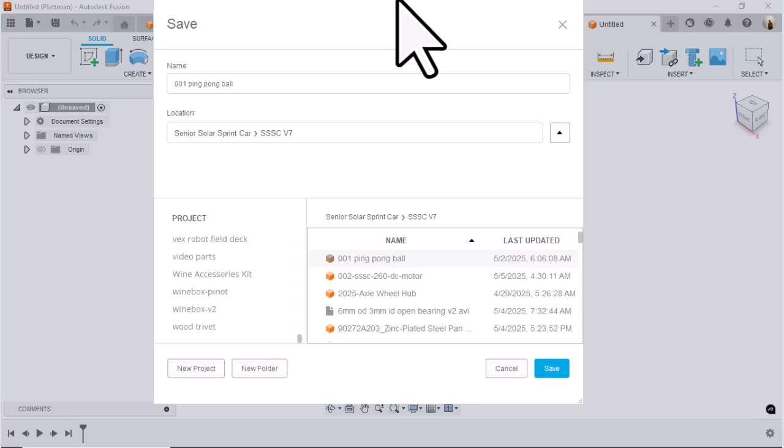Now what I'm going to do is place, open this up. We're in V7 right now. I'm going to go ahead and take this and place it out here. Once it's placed out here, I'm going to hit OK. That'll lock it into place because you see the anchor right here on the part.

We'll roll up here and see if we can find some suspension parts. I don't see them here in this folder, but we do already have them in the 8 folder. So we'll come over here to SSSC V8 and open that up, and we'll place the front one in here.

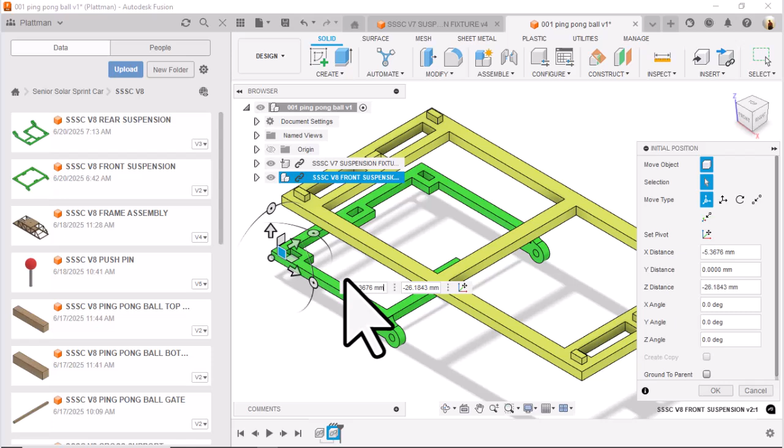Now these will come in like this. So I'm going to go ahead and pull this down like that, and slide this forward, kind of pre-position it. Let me just roll out here a little further so you can see it. I'll come up here like this, and it's pretty simple how this thing works.

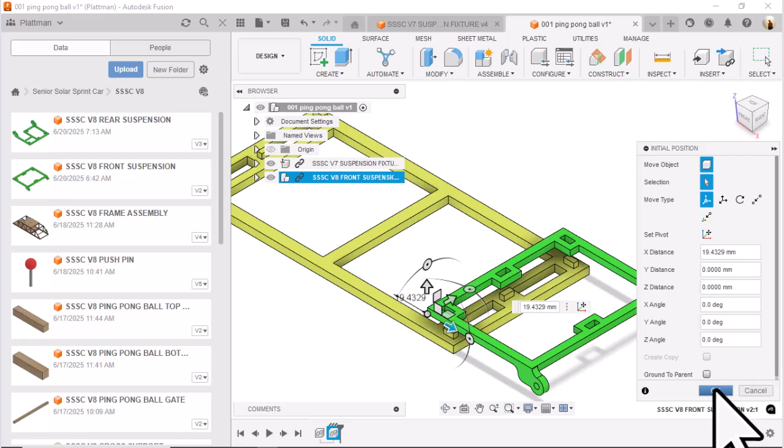You basically come in here and place it right here, and just put a place there. What I'm going to do is a joint, and I'm just going to grab this one center part right here, rotate the model up and grab that right there, and it'll line it up. Okay, so now I hit accept on that.

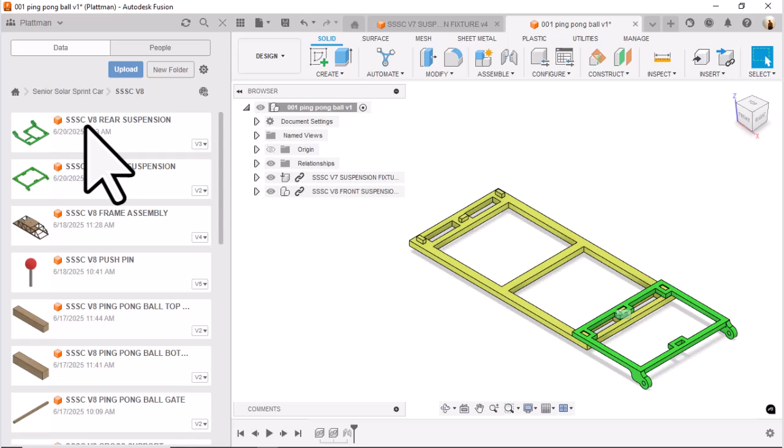We'll go to the 3D view. We'll roll out here and we can see how it's lined up. Now I'm going to go ahead and place the rear one in there as well. So I'm going to go and put him in here like so.

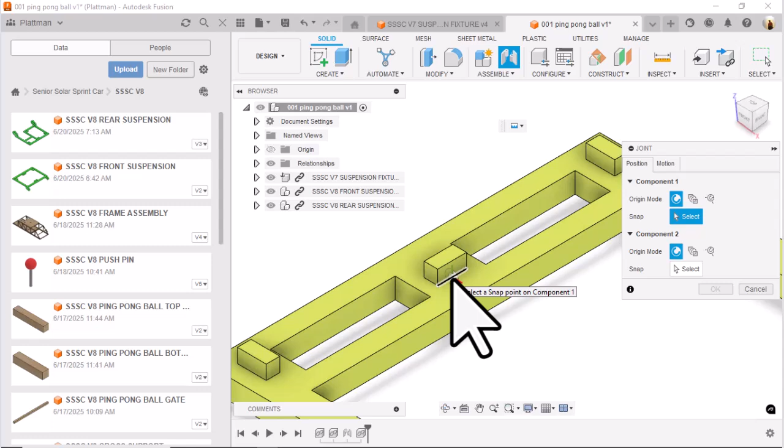Now again, this one comes in upside down, so we're going to have to fix that. So I'm going to rotate this around 180 degrees. I'm going to do the same kind of joint operation as I did before, and I'll hit the J key for that. I'll roll up here, pan over, come up here on this, and I'll put the J key, point there.

So now what we're going to do is roll this out, and we're going to take a look at it. I'm going to hit OK, and you'll see both parts joined together.

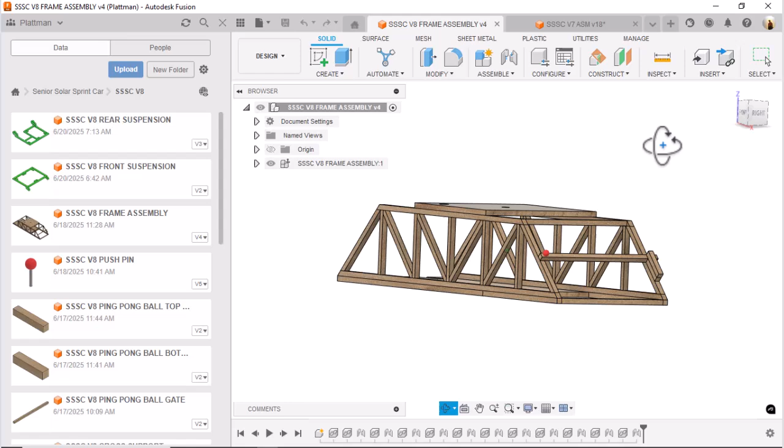Now what this does is allow you to take these 3 components and put glue on the top edge of here, and glue on the top edge of here, and flip it upside down and attach it to the actual frame itself, this guy right here. You'll come in here and put it in upside down underneath this, so that the front and rear wheels will be perfectly aligned and the car will track truer down the track as it's racing.

Now going back to this assembly, this test assembly that we're talking about, let me see if I can find that. Okay, that's the assembly there. I'm going to keep that up, and let's go find that assembly real quick.

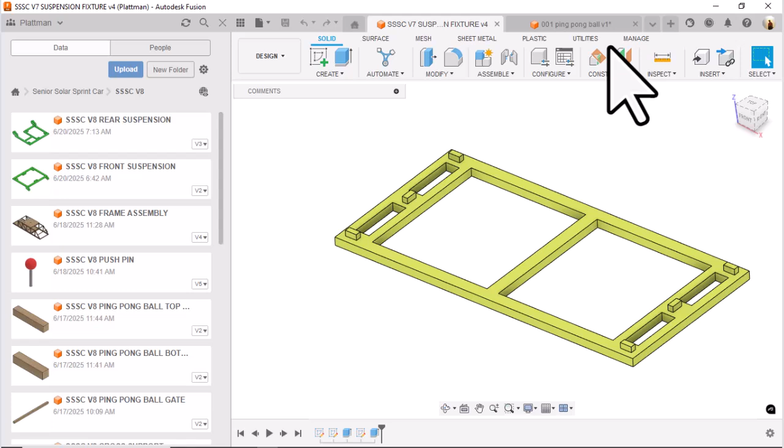This guy right here. Okay, so we're going to take this guy and put glue on the bottom of the frame, and then we take this guy, turn it upside down, place it, and then this alignment tool makes sure that the front and the rear are perfectly aligned.

So then we remove it. We don't glue this onto the car. We just remove this and get it out of the way because we're not going to need it after that.

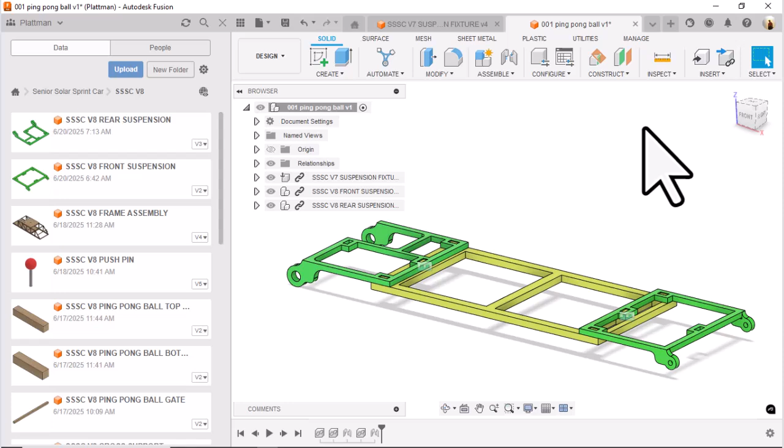And you can see that actually in the original assembly, if I can find that guy real quick. Let me see if I can find it here. Let's do this.

We'll open all these up. Okay.

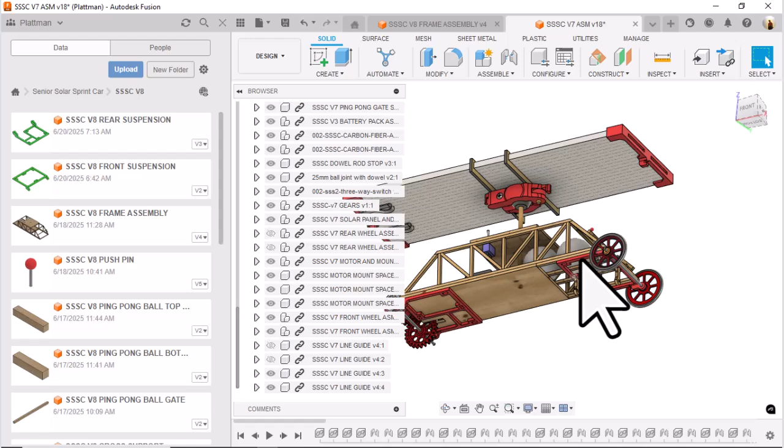Let's see here. Yeah, the V7 assembly. So when you take this and go to a 3D view, what happens is that alignment tool aligns these parts up perfectly, so that way you can remove it after these pieces - the front and rear suspensions - are glued onto the car. So that gives you a pretty good understanding. Kind of long-winded, but...

We need to do that so you guys can understand it. So I'm going to come over here and start looking at some parts. Keep that one up. I'm going to go ahead and end that because I don't need to save it - it's just something you can see.

Now I'm going to go ahead and create a new file, and in that new file I'm going to do a save here, and we'll say SSSC V8, and we'll say suspension alignment tool.

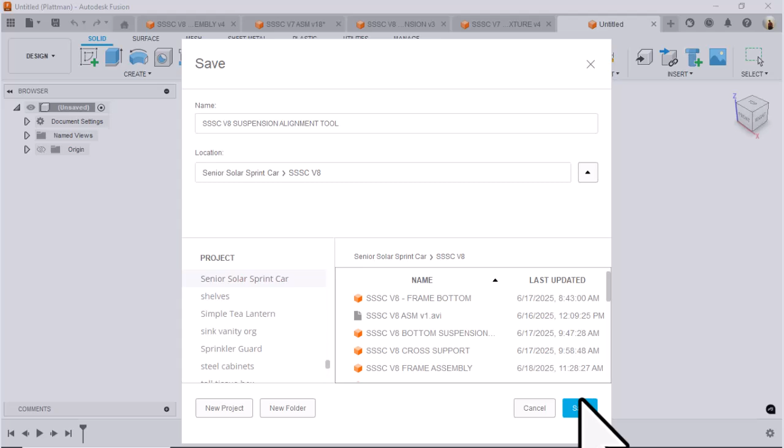Highlight all that, copy this. Now we need to make sure we put it in the correct directory. So I'm going to go back to this and find my V8 directory and make sure that file is saved into that directory. Okay, so now once that's done, we'll go ahead and right mouse click, create a new component, highlight this, Control V, and put that in there.

Okay, so we're almost ready to get started. I'm going to go back to that fixture and take a look at it, and let's get our pencil out and let's get our post-it note out so we can write some notes here. So the first thing I want to do is find my post-it note.

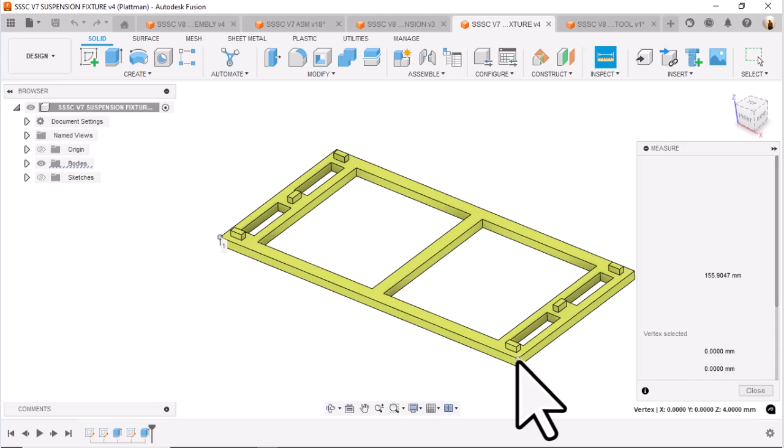Here we go, and I'm going to write down some measurements. We'll go ahead and hit the I key for inspect. We're going to take a measurement from here to there, and that's 155.9047.

And I think this other one should be about 78 millimeters, but we'll double check that. So we'll go from here to there, and yes, it is 78 millimeters. I'm just going to go ahead and copy that. Actually, I'm not going to do that.

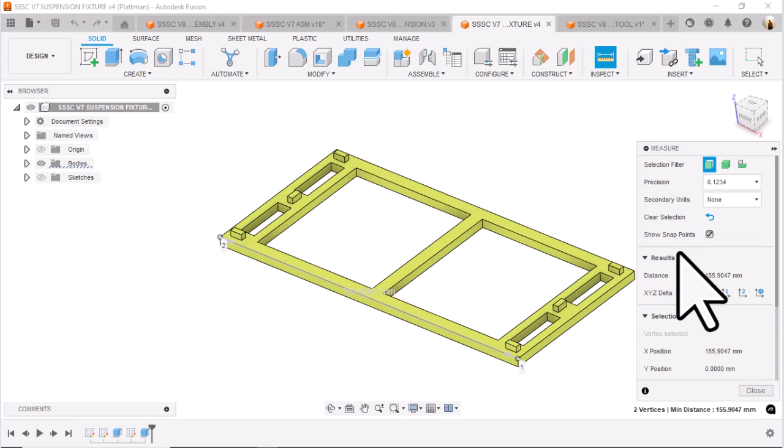I'm going to come over and get that measurement again here, and I'm going to copy that one because that's a longer number. So we'll come over here and go to the top view, as you can see, and we'll draw us a rectangle. Okay, we'll say 78 millimeters, tab, Control V.

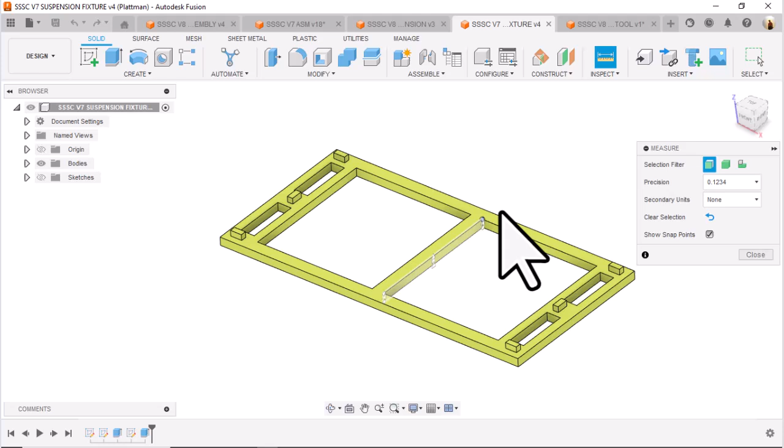Okay, there we go. Now let's go back to that fixture and catch a quick little measurement here. It looks like 4 millimeters from this point to that point. We'll make sure we look at that. Actually, let's see, right here - let me take a closer look at that. It is 6 millimeters. Okay, that's good.

All right, so we'll come back over here to this, and we'll do an offset to the inside. Flip that, and we'll say 6 millimeters. Whoops, wrong direction - we don't want to go two-sided, we want to go one-sided, and we want to flip that. So that's better. Okay, got that.

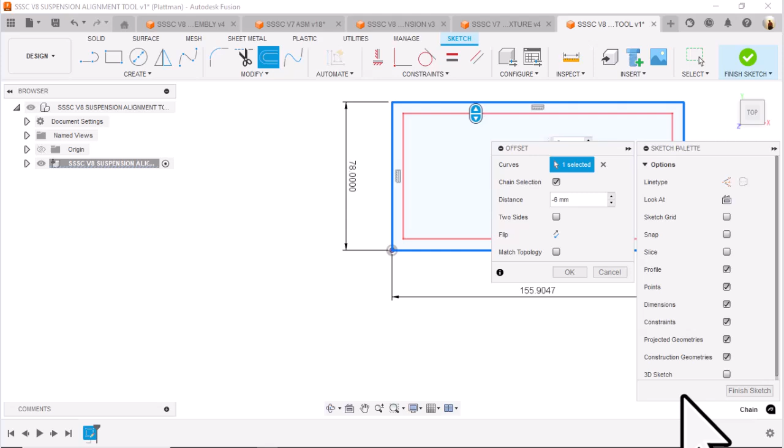All right, now I'm going to go ahead and place a center line because I know I'm going to use it. I'm going to come up here and snap - make sure you get center line. I'm up here, find the midpoint, come up here to that. I'm going to turn these constraints off so I can see it, and hit my line command again, and make sure I'm set to center line. Come across here and come across there.

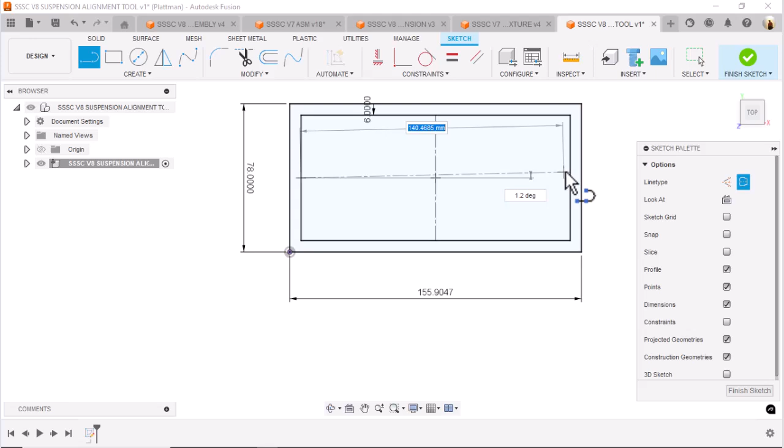Okay, it's a good place to take a quick little break. Come back to this in a moment.

Okay, now that we've got that drawn in, let's go ahead and look back at that fixture again. Looks like we got a middle beam coming off there. Okay, that's fine. So we'll come back over here and, whoops, go back and check that one more time. Hit the inspect command - I want to get a measurement on this. Okay, that's 6 millimeters. Sounds good.

Okay, just highlight that. We'll come back to here, and what we're going to do is an offset. Hit this guy here, and I can come off Control V divided by 2.

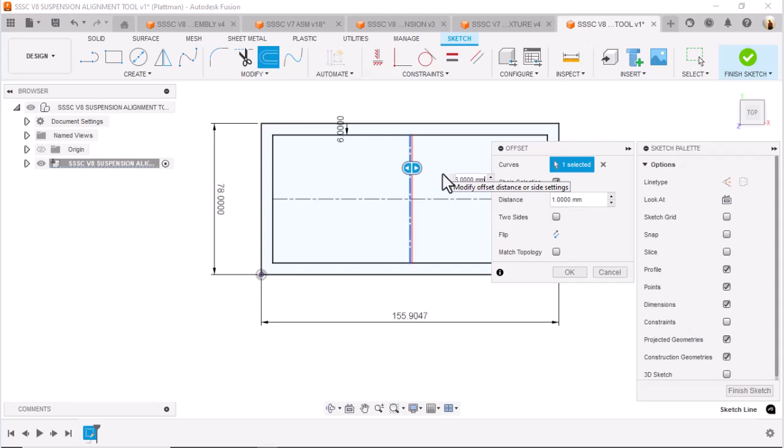Okay, so that gives me 3 millimeters. I know that's a little bit of a roundabout way to do it, but it does show you how you can use equations inside of Fusion.

So now I'm going to come up here and do a trim, get that out, move up here, get that one going, get that one going. Okay, it looks pretty good.

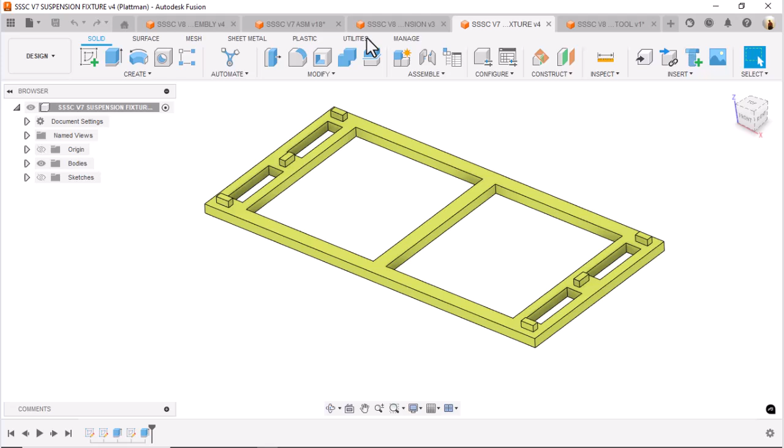Now let's go back to this fixture, and let's get a quick measurement from here to here. Make sure that it says it's 15 millimeters. Okay, all right, we can do that.

So we'll go back to this, and we'll come in here, and we will draw us a line somewhere here. Doesn't have to be perfect. Now that's still set to a center line, so I'm going to go ahead and select that line, make it a solid, and I'm going to do a dimension from here to there, and I'm going to say 15 millimeters.

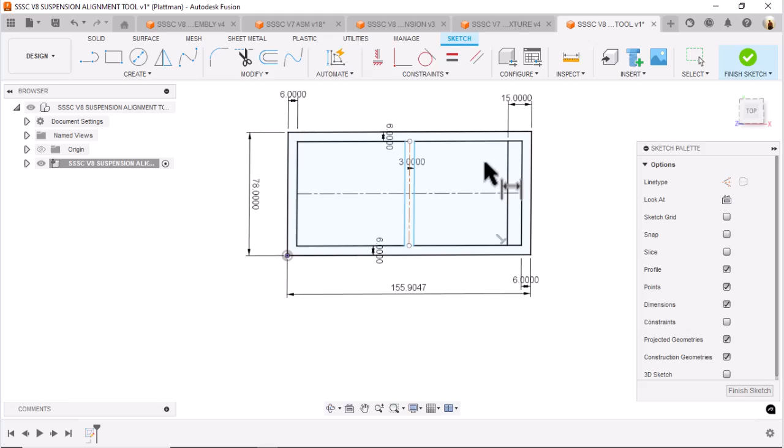Okay, looks pretty good. I'm going to double check this one more time. Hit the inspect from here to there. Yes, it's 15 millimeters. Okay, let's go ahead and reset that.

Let's get a quick measurement of this guy right here. So we'll go from here to here. That's 4 millimeters. Okay, we can make that happen.

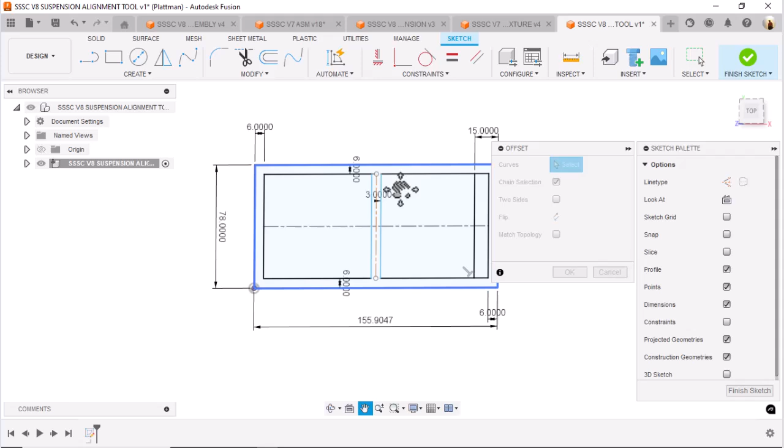So we'll come up here, do an offset on this guy right here, and we'll flip the direction, and we'll say -4. Okay, so that's in. Now it's looking pretty good. What I'm going to do is try to construct all this geometry, then I'll mirror it to the other side.

Okay, now what I want to do is I want to go to a top view, because this does look different. So I'm going to come up here and I'm going to catch a measurement of this to there. Okay, and that says 8.85.

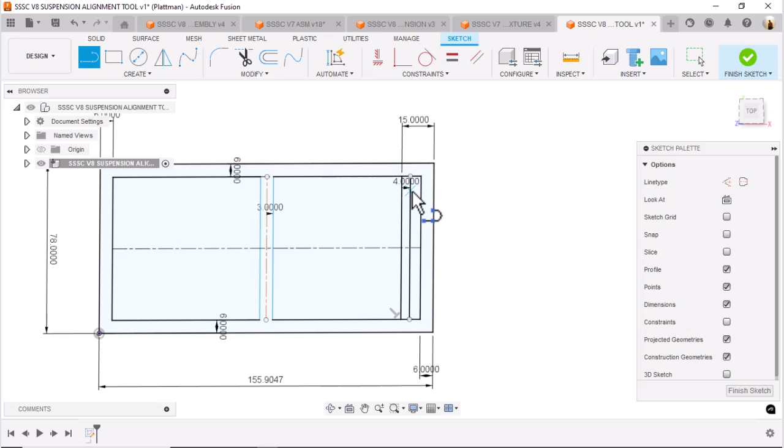Sounds good. We'll come over here and draw us a line somewhere in here. I'll just put it over here, and I'll come into a dimension from there to there, Control V, 8.85.

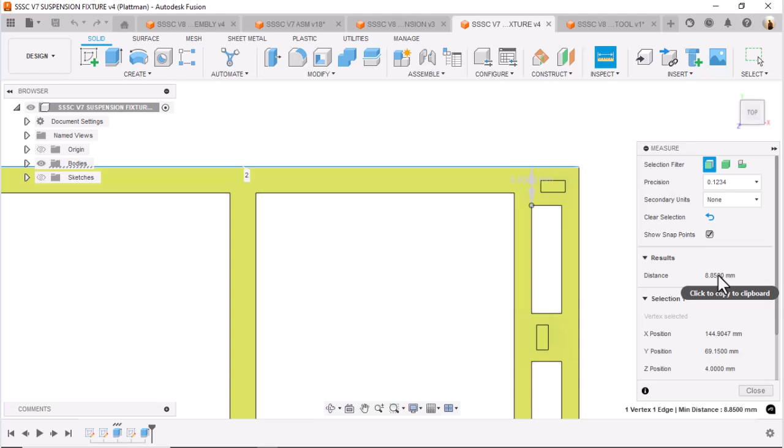Let's check that again. We'll do that again, measure. Distance of 8.85. Okay, let's go back over there. That should have not gone. Okay, for some reason.

Oh, put a center line in there. Okay, we're going to do a Control Z on this. Okay, there it is. So we'll take that, because it was a center line. Take that out, and we'll go ahead and dimension this again.

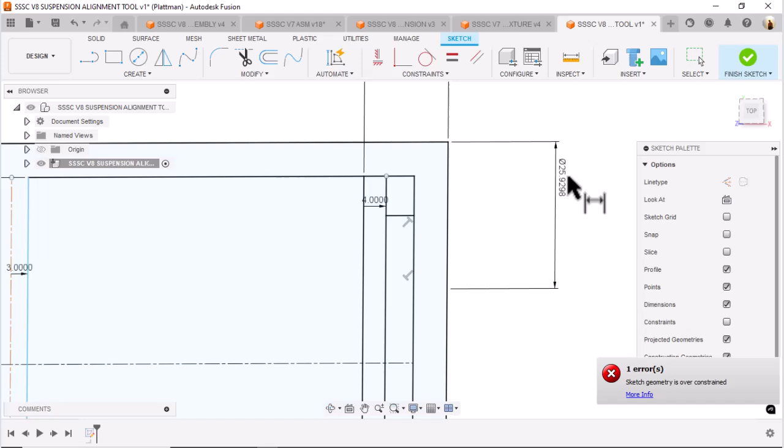Okay, I'm going to take that out. There we go. Dimension this again. And we'll say Control V. Better. All right, I like that better.

Okay, so now I'm going to hit the T key to trim. I'm just going to trim this out.

Good. We'll come down here and do a mirror operation of this. Use our mirror line here. Put that right there. Good. Got that up here. Hit the trim command.

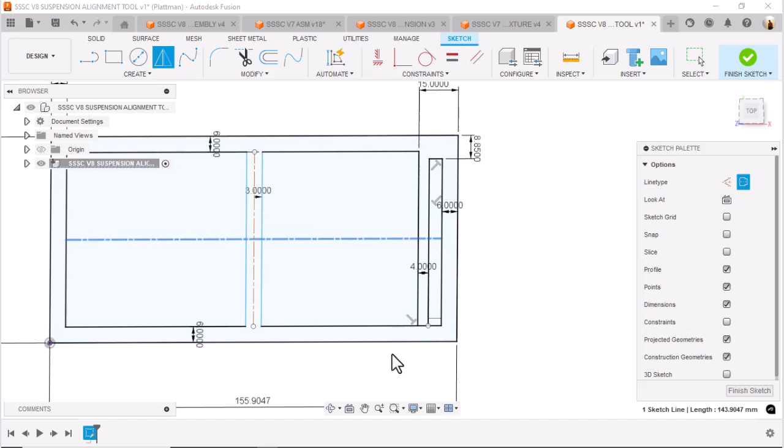Okay, it's looking good. Got to put that centerpiece in here. So let's go back and look at that. All right, so the distance from here to there is 24.6693.

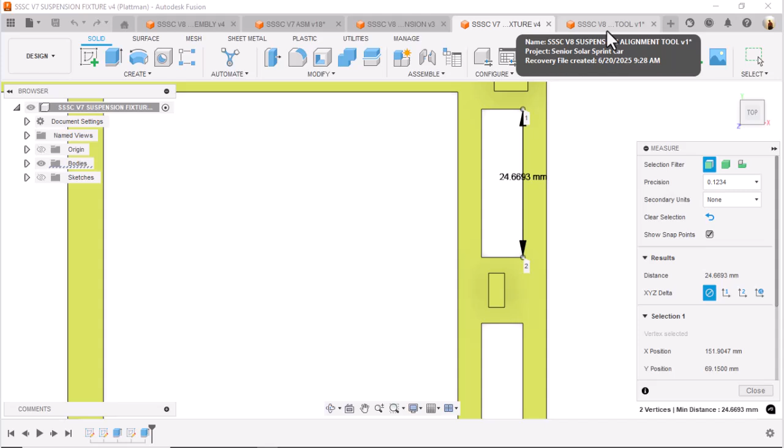We're going to copy that to the clipboard. Go back over here to this guy. We'll just put a line in here somewhere. I don't know where, but right there. And we'll put a dimension in from this here to there. And we're going to say that's Control V.

I don't know if that's correct. We're going to try that. No, it's not correct. Okay, so what we'll do is Control Z, and that distance from, let's go ahead and take this out. I'm going to say from this line here to there.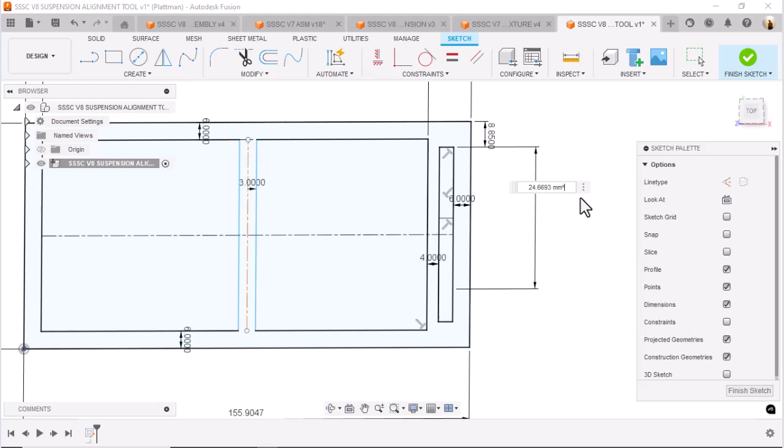Okay, so I think I know what to do. Control V, I'm going to put times 2. Okay, that got it. All right, a little bit complicated, but you get the idea.

So we'll mirror this here, select our center line there. Okay, hit OK. Now let's go do the trim. Trim this out, trim this out, trim this out. So now we've got geometry that we can copy over here to the other side.

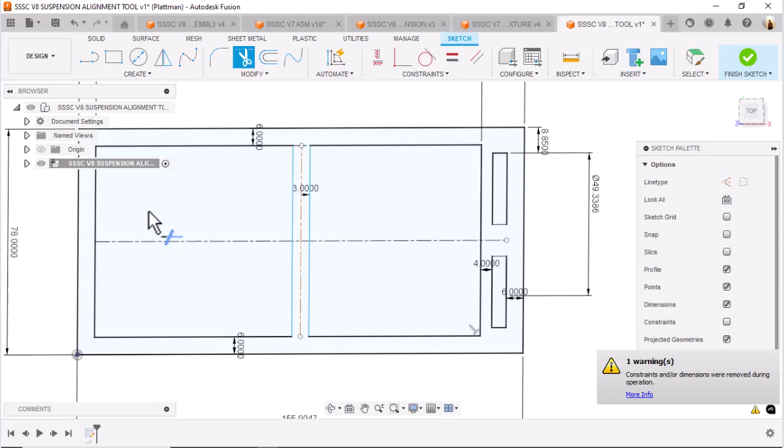Let's go ahead and do that now with the mirror operation. Roll out here, make sure we get everything we need from there. Looks good. I don't need that point, so get rid of that.

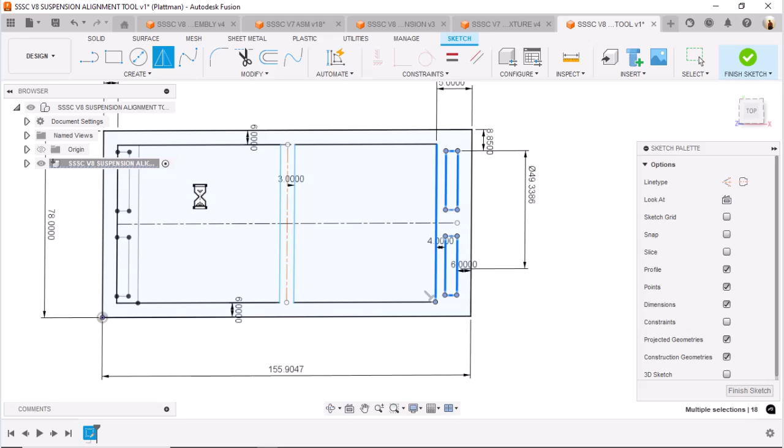Select my mirror line. There it is. And I'm missing, go back up here, I need to get that too. Hit OK. Good. Got it in. Yeah, let's trim this up. It's T command, trim.

Looks good, trim this out. Trim that out. I think I can trim this and trim that out as well. That's looking really good. Okay, I think we got what we need for the basis of that.

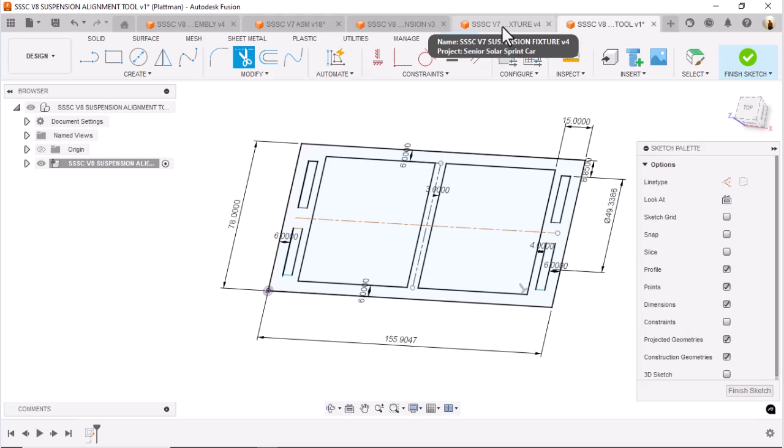Let's go check the extrusion length. I think it's 3.175. Let's measure that again. Yeah, oh, it's 4 millimeters.

Okay, we'll take that. We'll come back over here, hit the E key to extrude, and I'm going to grab this shape, and I'm going to hit distance, Control V of 4, and there it is. Okay, so we got that done.

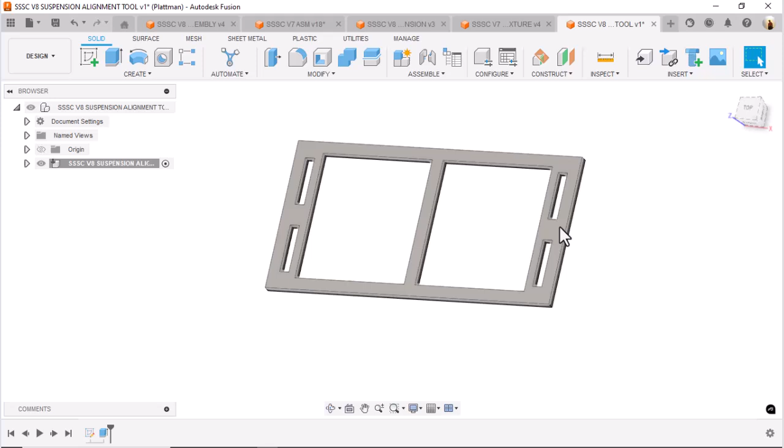Now let's stop here for a minute and come back. All right, second time's a charm. I didn't have my microphone turned on, so we'll do this again.

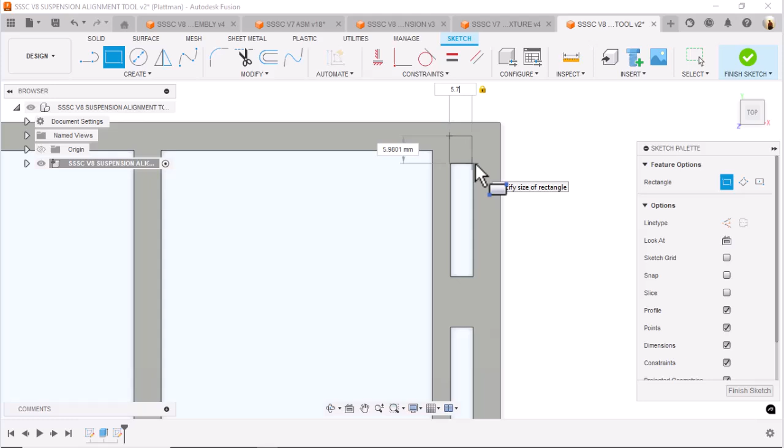So we'll go ahead and design on this plane here, put our tabs in, and I'm going to go ahead and design these tabs. I kind of already know the dimensions because I checked them. They're basically 5.7 on that, and then I'm hitting my tab key, and that's 2.7. And that basically gives us room to put the tab into the actual suspension parts with a little clearance, because printers overprint, so we make these a little smaller.

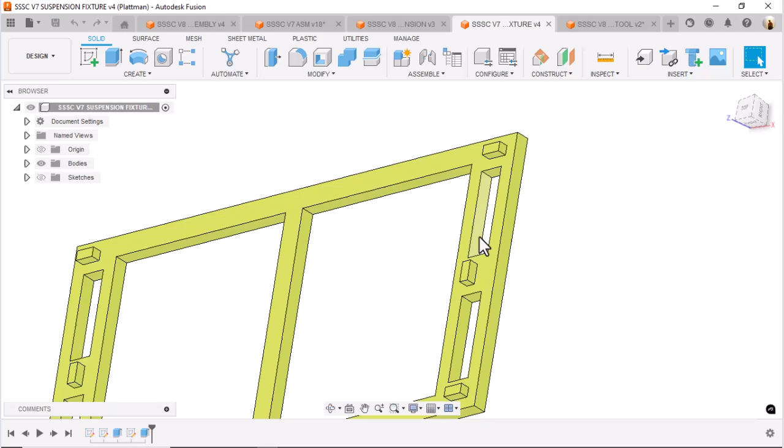Okay, now let's go back to the fixture here and let's double check some measurements. I'm going to roll out here. I'm going to hit the I key to inspect, go from there to there, which gives me a measurement of 3.15. I'll copy that to the clipboard, and I'll put a dimension in from here to here, and we'll say paste that in, move that over. That looks good.

Go back to the fixture here, hit another inspect from there to there. And again, that's 3.15. We'll take and copy that to the clipboard, hit our dimension command here, and put that in.

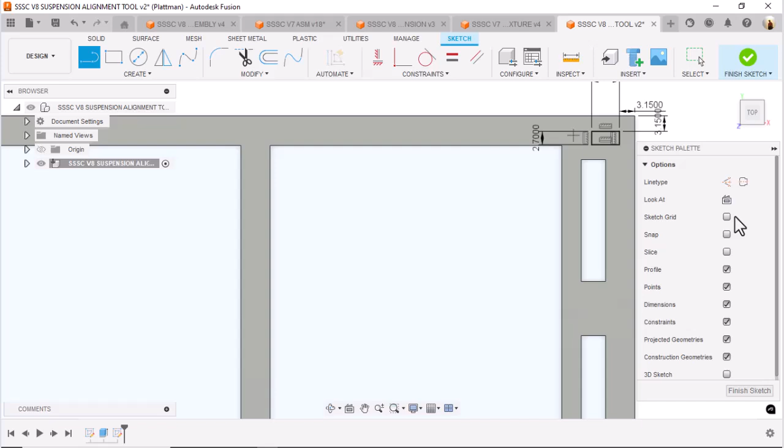Now, one of the things that I should have done before I started this is I should have put a center line in. So we'll go ahead and hit the L key for line, and we hit center line up here. We'll grab the midpoint of that outside projected surface, grab that. We've got a center line in there now.

And now I'm going to come over here and do another one, except, whoops, let's do that again. We'll put another center line in, make sure it's that center line. Find the midpoint, there it is. Take it all the way to that edge. We'll come back to that as to why later.

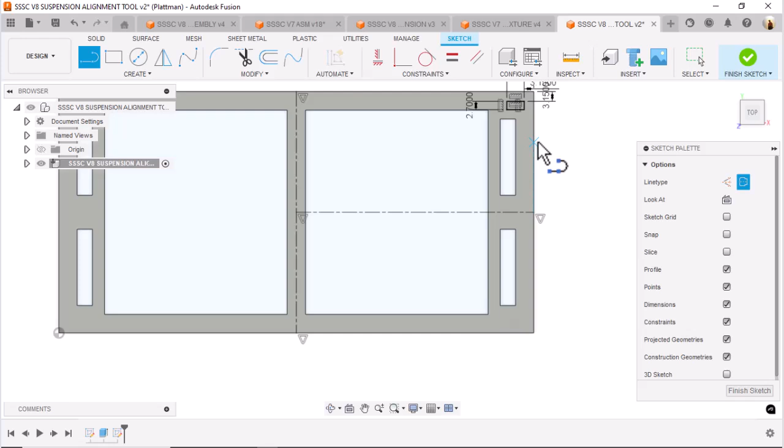So now let's go ahead and mirror operation this guy right there. Let's find our center line, which is this guy here, and there it is.

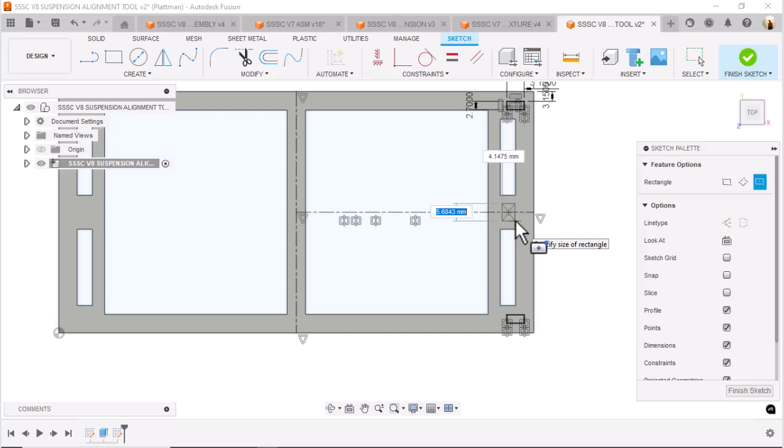Very good. Okay, so next we'll go and place a rectangle by center. I'm just going to put it somewhere right in here. And again, our sizes are the same. They're 5.7. Whoops, not 5.0. Let's double click on that again. Double click on that. 5.7. Okay, put that in there. And that should be a dimension of 2.7. Okay, all right, that's in there.

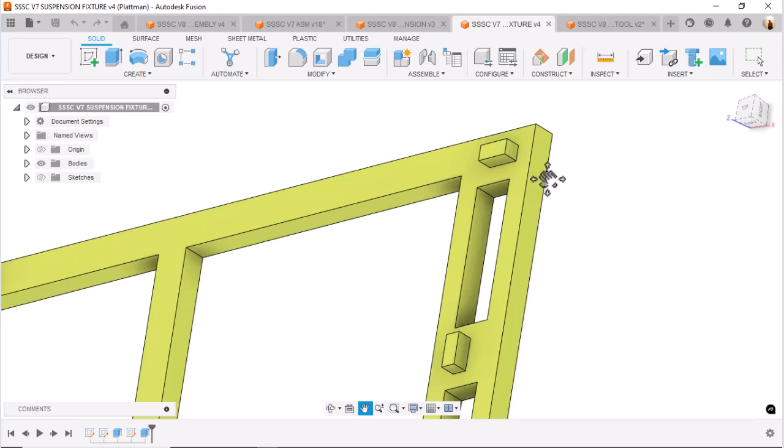So let's go back to this and let's catch a measurement using our I key for inspect. We'll measure from here to there. And that says 7.1023. We'll copy that to the clipboard.

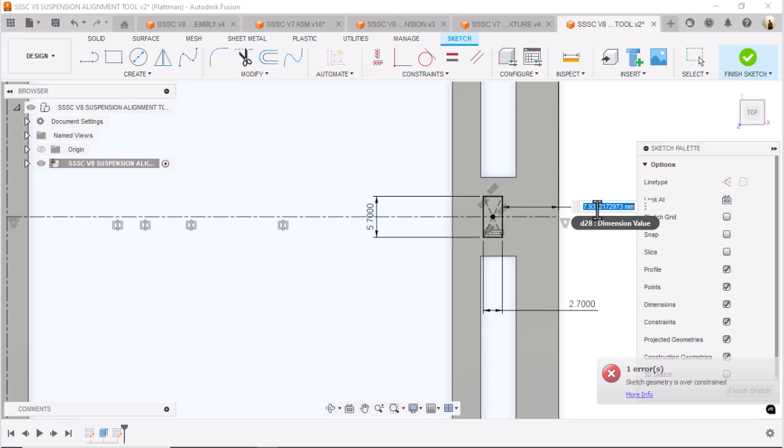We'll come back over here to this, hit dimension. We'll come in here to there. Whoops, we don't need an angle. Dimension again, here to there, and we'll just paste that number in from before. All right, that looks good.

Now we'll roll out here a little bit, and we're going to use a mirror operation. We're going to move this out of the way because we're going to use our shift key. I'm going to hold my shift key down. Got that. Keeping with my shift key down, I'm going to get this. I'm going to come over here with my shift key down. I'm going to get that. I don't know why it highlighted that point, but we're going to get rid of that and that. Whoop, I'll get rid of these two.

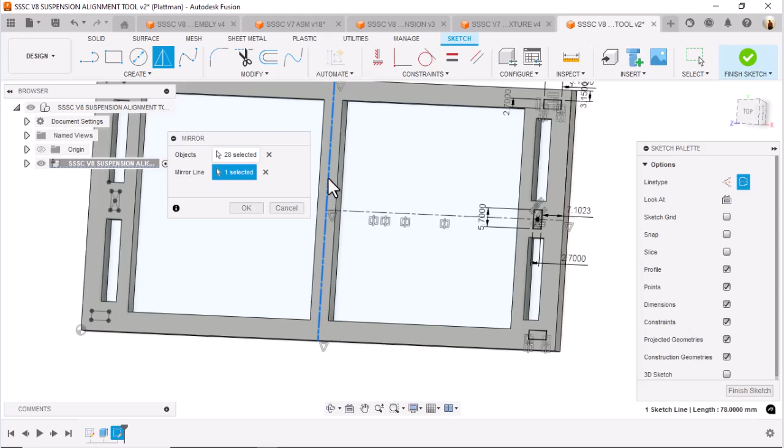Okay, now we'll go and find our middle center line and put that in there. That looks good. All right, hit OK. And now we'll hit our E key, but let's double check that measurement because I can't remember everything. We'll do an inspect again.

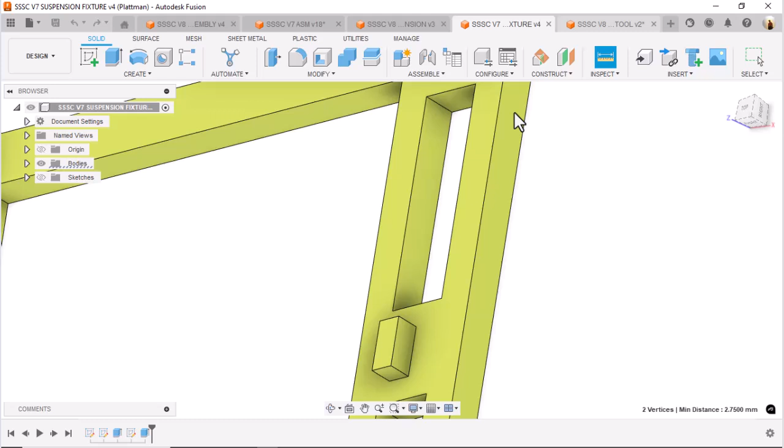Go from that point to that point. We'll copy that, it says 2.75. Come back over here to this guy, and we're going to do our extrude. We'll hold shift down and hit the E key for extrusion. Grab that with shift down. Grab this, grab this, grab this, grab that. Oh, I've got to get the second part. And then grab that. Then we're going to do a Control V, and there it is.

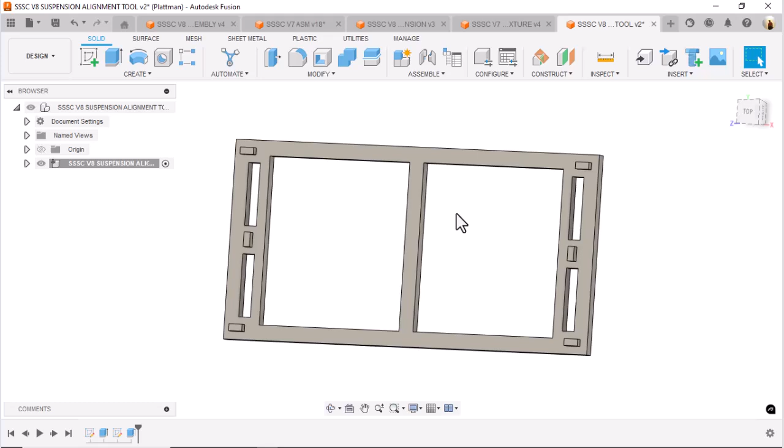Okay, so we got our part design, our alignment tool. Now let's hit our A key and come up with a different color. I'm going to drag this back over here so you can see it. I'm just going to put yellow on there because I need something to differentiate from the green that we're using on our suspension parts. Okay, that looks great, and we'll come back to this now and create the assembly of the two suspension parts.

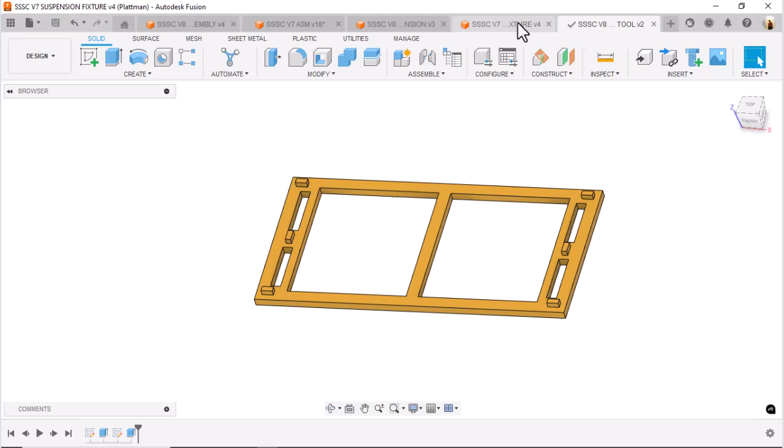Okay, so now let's go ahead and save this file real quick, and let's create a... okay, and we're going to turn this on here. I don't need that anymore, we'll get rid of that. So there's our front suspension, we finished that one, we'll get rid of that. And we'll keep this up because we use it a lot.

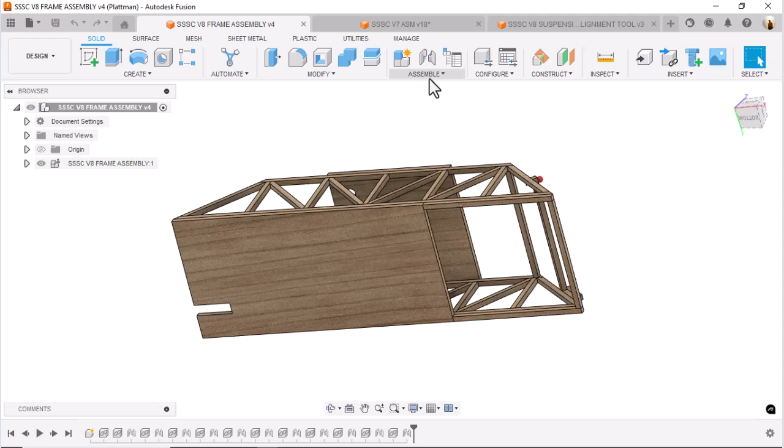But again, we're going to create an assembly where it allows us to place these two in here. Now, you've probably heard me say in class before, with 3D modeling it's like playing chess versus playing checkers. And this is going to be a very good example of what I'm talking about.

So we're going to do this. We're going to save this file as SSSC V8, front and rear, using an ampersand, front and rear suspension. Now this is going to be kind of interesting how I do this.

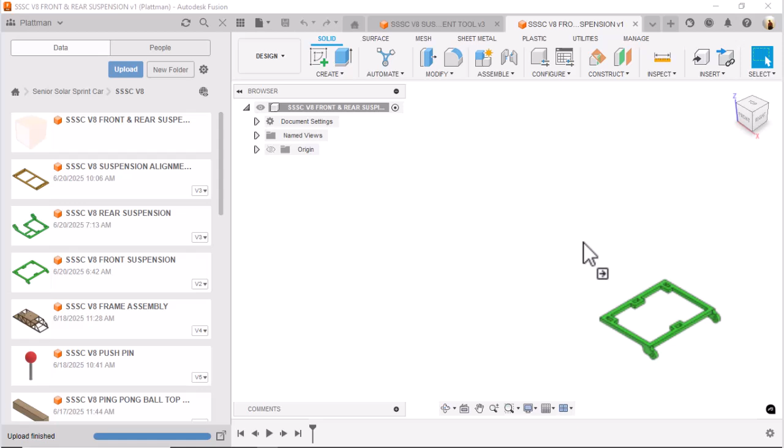You're going to have to really follow closely with what happens. So the first thing I'm going to do is go to my parts library, and I'm going to grab that front suspension. I'm going to put it in here like that. Okay, just go ahead and hit OK and put it in there so it's grounded. So this is the front suspension.

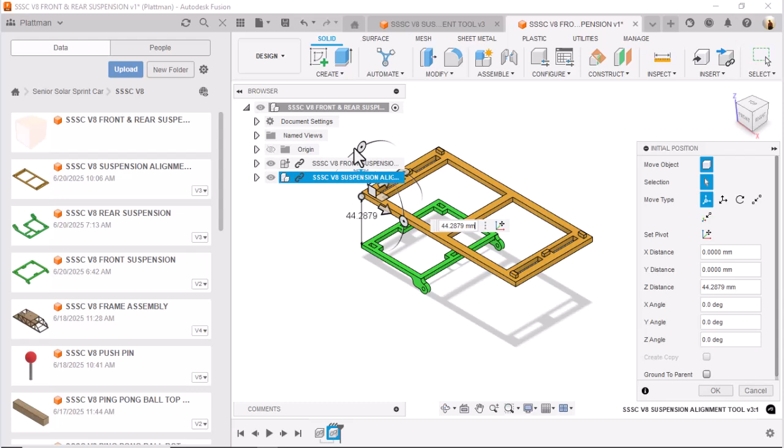Now what I'm going to do is place the suspension alignment tool in there. Oh gosh, that's big - that's all right, we knew it was going to be big. But now we need to rotate that. Actually, we don't need to rotate that, we need to lower it below the car.

Now what I'm going to do is hit OK for that placement, and I'm going to come over here and grab this one little point, the midpoint right here. So I'm hitting my joint command, tab that over a little bit, move that over, hit that point right there, just in that orientation. So now I'll roll out, or double-click on my middle mouse button.

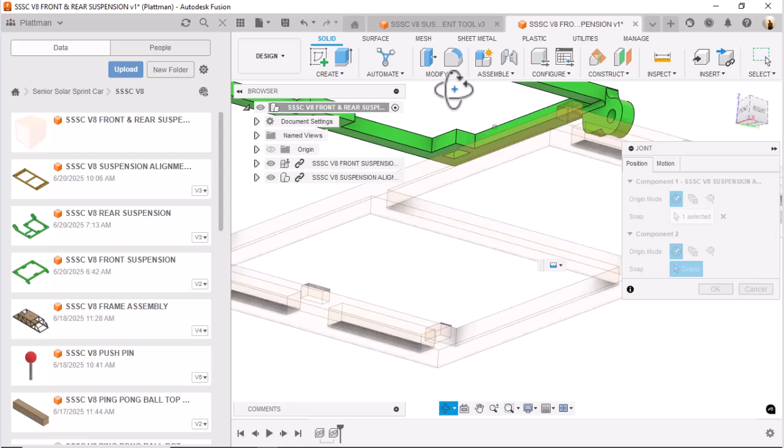I'll come up to this, and let's double check what I did. Okay, I got that point there, and I'm going to rotate this up and join it to right here. Okay, it's in, that's good. We hit OK, roll out, come over to the top view.

Let's see what we got here. Hope I did this right. Yeah, I did it right. Okay, that's good, that's exactly what I want. Yeah, it's kind of offset here, that's kind of wonky looking, but do not be concerned about that - that's the clearance we needed for our 3D printer if it overprints.

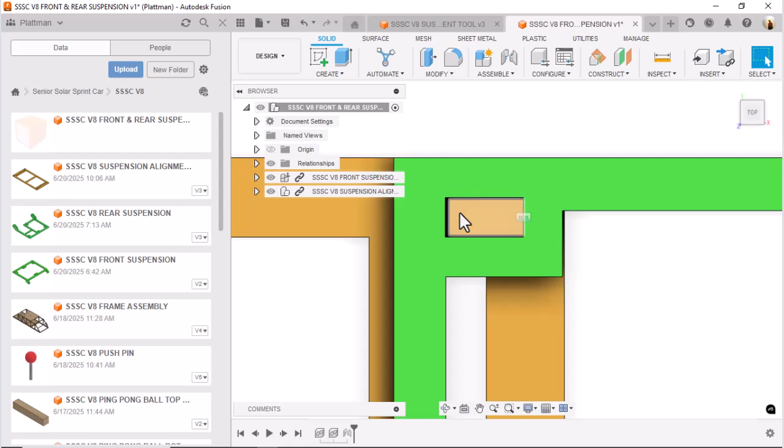So here comes the fun part. What we're going to do is place this rear suspension. Now I will have to rotate over 180 degrees. In fact, I'm just going to slightly rotate that so I can see that field, then hit 180 degrees.

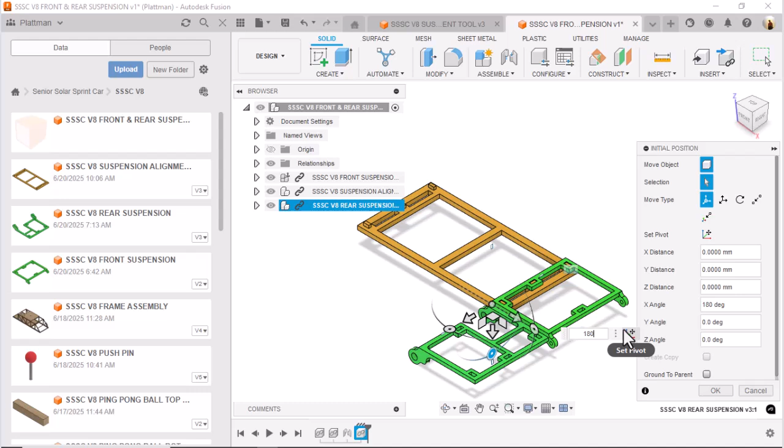Now I'm going to take this guy and do a temporary joint. So bear with me on this. Let's go ahead and close that off, we don't need that anymore. We hit the J key for joint.

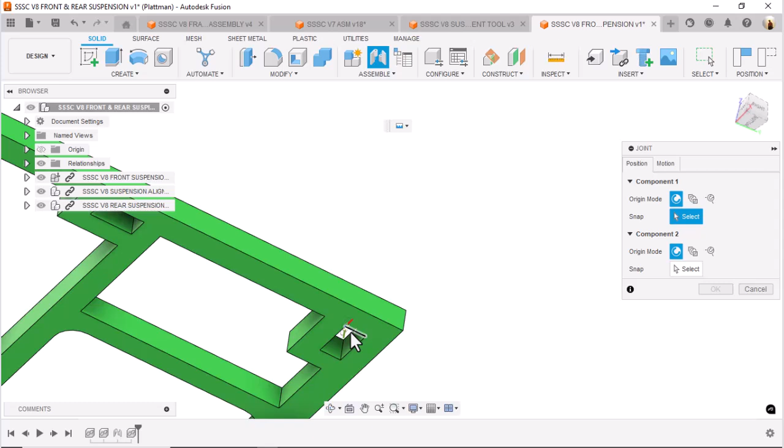Here's what I'm going to do. I'm going to temporarily grab that point right there, rotate this around, and roll up here on this, and I'm going to hit joint right there. You're probably saying, okay Platt, what are you trying to do here? Well, let me show you.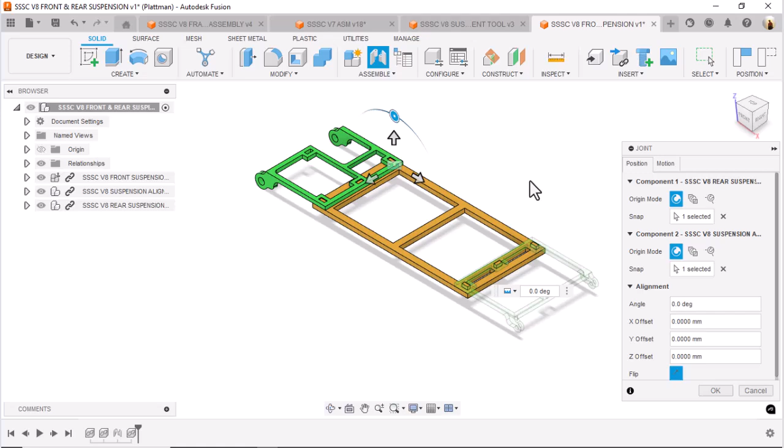Again, we're playing chess, not checkers. We're looking at two moves down the design process. Okay, so that looks joined pretty good.

Remember, get our pencil out and our Post-it out. Here's what we're going to do: we're going to measure from here to here. Okay, that says 130 point. I'm going to copy that to the clipboard and write that down, 130. And that's going to be .0001. Not that I need it that accurate, but we're going to go with that. So we're going to hit close.

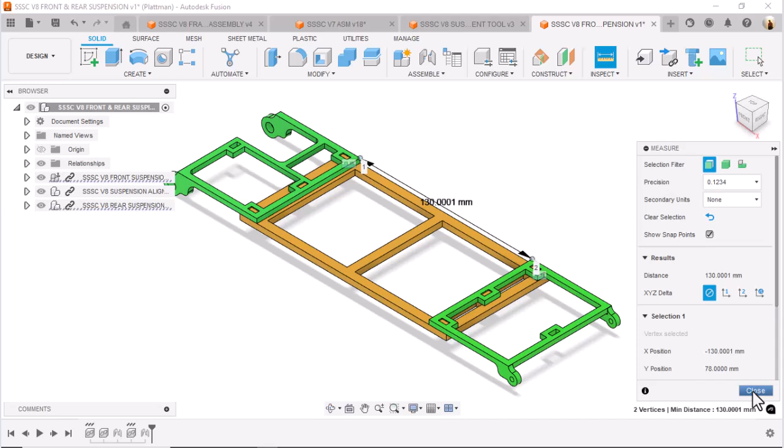Now what we're going to do is delete that joint we just put in. We wanted that measurement, I'll show you why.

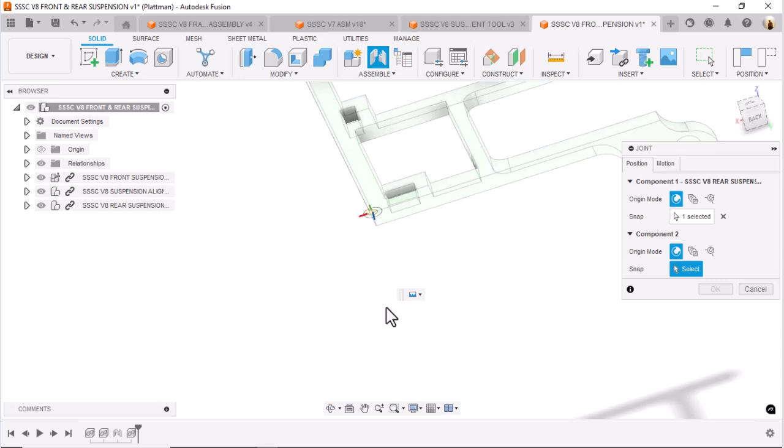Now I'm going to take this guy right here and move it up out of the way. I'm going to rotate around and hit a joint right there with the joint right here. Well wait a minute, Platt, that's not what we probably should be doing.

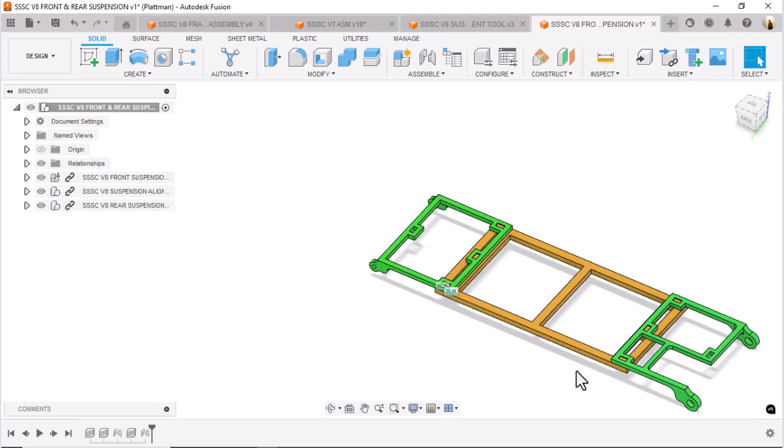That's okay, now watch this. I'm going to highlight this field here and Control V. You're saying, well Platt, that was the same thing we had before. Yeah, you're right, it was. But here's the difference: on this one, it's going to allow us to create this assembly, which we're going to save right now. Hit save.

Then we'll come up here to object visibility. We'll turn our joints off because I don't need to see those. Let me try that again. Joints off, okay, don't need to see that again. Save our file.

Now the reason I did that joint from this end to this end, I'm going to delete. I'm going to get rid of that alignment tool from my overall assembly. But I need it now so I can place it in the actual model.

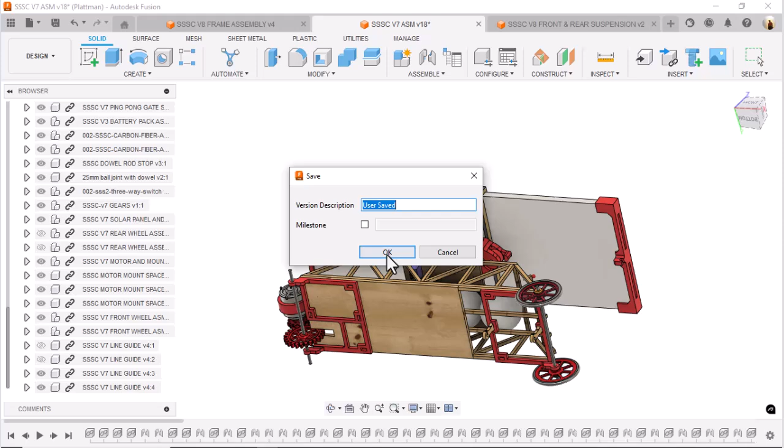So we'll go back to our V8 assembly. There's a suspension, we're going to kill that, turn that off. We're going to save, go here, save this file. Okay, because we're going to use that later. Now we're going to come over here to the V8 frame assembly.

All right, now the fun begins. We'll go ahead and show all our parts. We're going to hit refresh, and it should show us that assembly. We're going to pull that over here and put it in here.

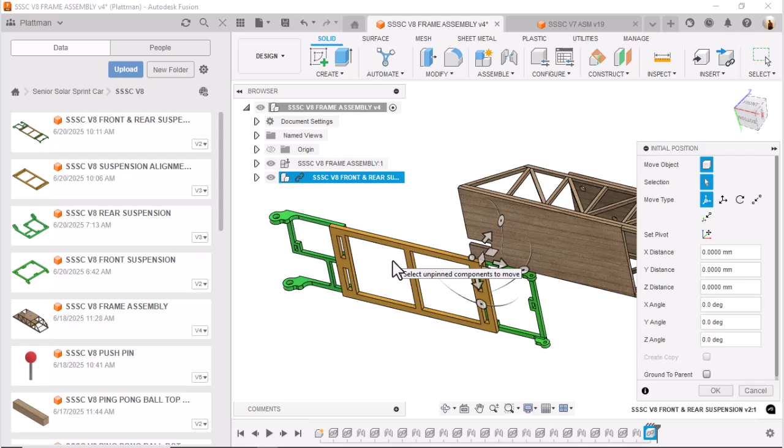Now, in the world of make-believe and pretend, we're going to pretend that this joint is going to be like how we're going to actually assemble this file. I'm going to pull this out a little bit here and watch what I do. I hope this works correctly. Let's see, we hit OK for that location.

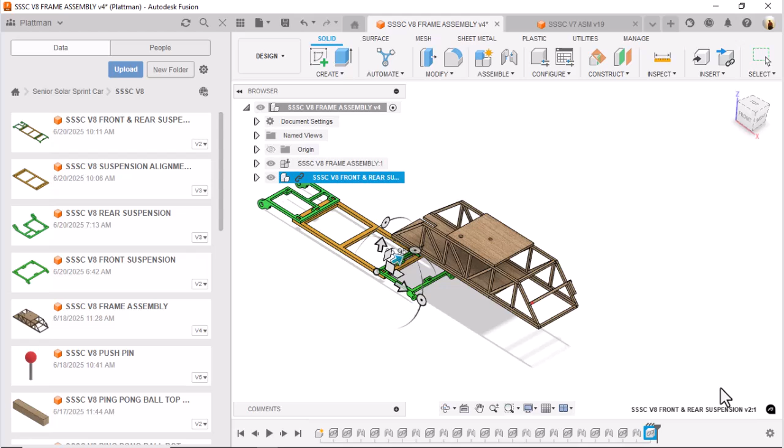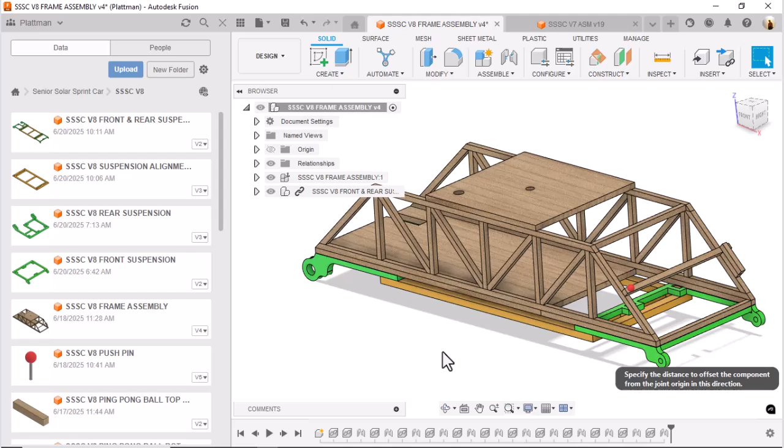And I'm just going to hit a joint on this. We're pretending like we've put glue on the top of this green one, and I'm going to rotate this up. Got glue on the bottom of this, however which way you want to do it. And we're going to join that. Hit OK, roll out, and voila - there is our aligned assembly of this particular car.

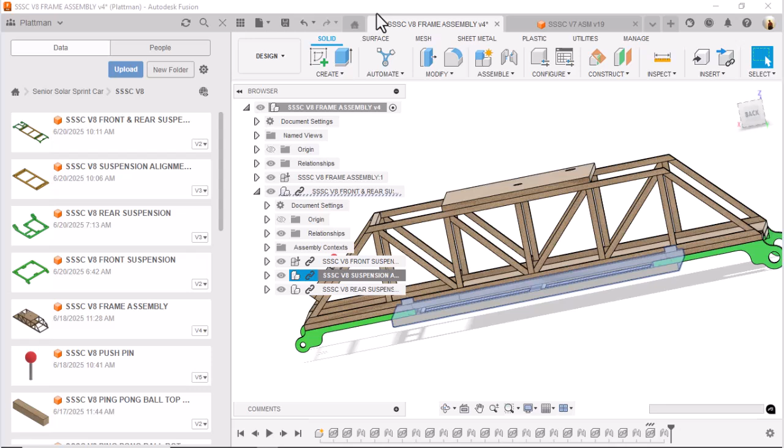You're saying, Platt, you don't want to keep that in there. Yeah, you're right, I don't want to keep that in there. So here's what I'm going to do: I'm going to come over here and find that alignment tool, which is this guy here, and I'm going to edit in place that assembly, okay.

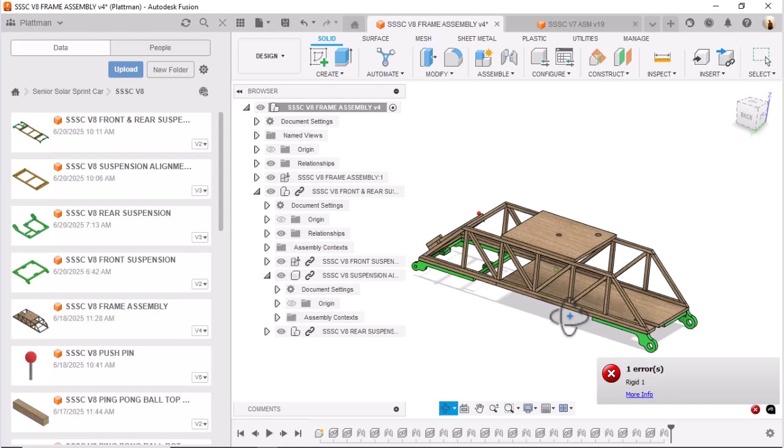And I'm going to come here and snap onto this, right mouse click, and delete it. Yep, okay, I'm going to get out of edit in place, and there it is. I've placed my front suspension in there correctly. You can see the gap over there for the gear, and this is placed in correctly.

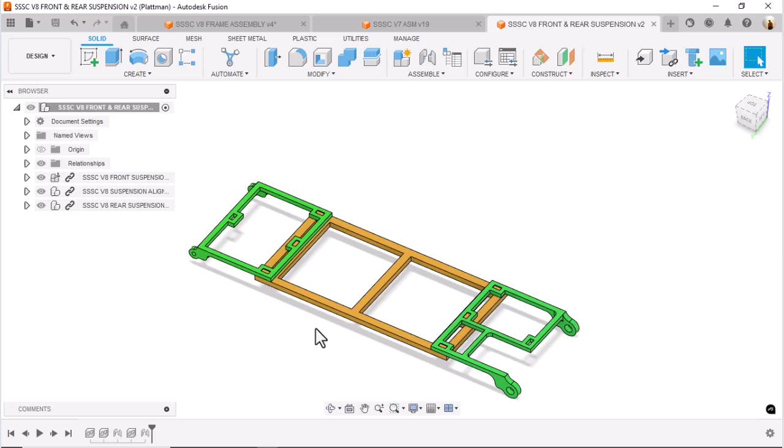This is cool, so let's recap what we just did. I created this suspensions assembly, and that's why that second joint is so important - because when I delete this alignment tool in this file here, these two are perfectly joined together at the correct and right distance. That's what we needed to do.

Let's go ahead and look at this at a side view. That's a bottom view, rotate this around. That's looking pretty good, I'm liking this. Okay, I'll stop here for now.